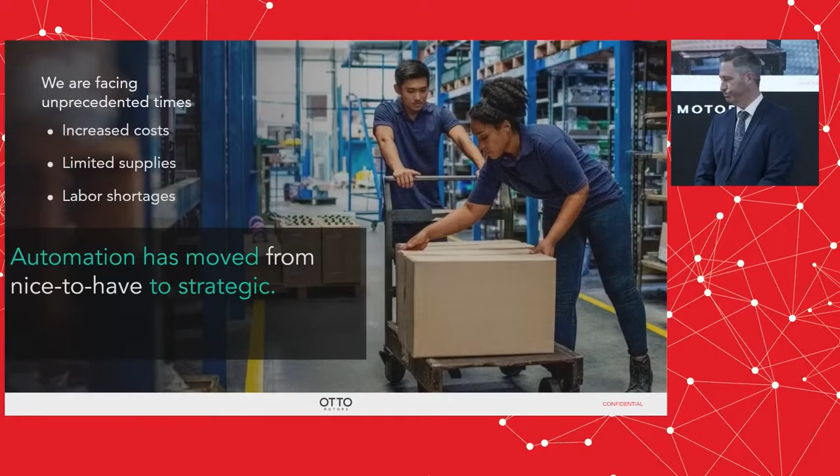When we look at material handling, it really hasn't changed in the last 30 years. We have people moving parts, we have manual pallet jacks, forklifts, conveyors, cranes, and AGVs.

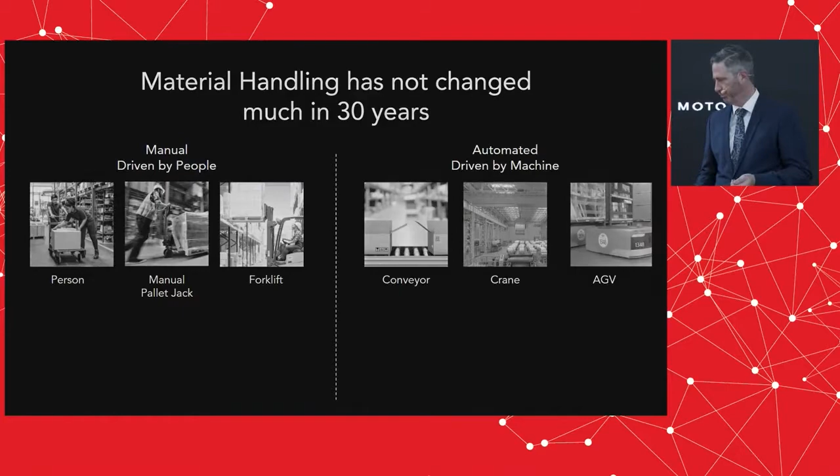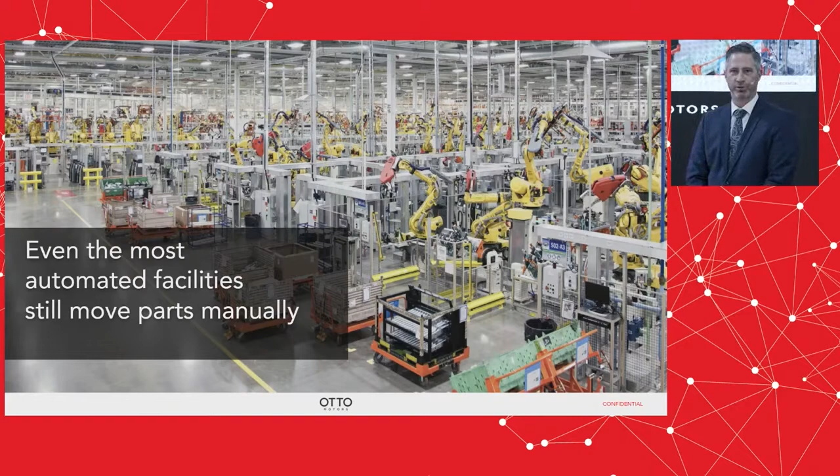So, with that said, Meet OTTO. We are in 100 plus sites globally. We have 12 years of material handling experience, and our target is to be 10% the cost of a full-time employee.

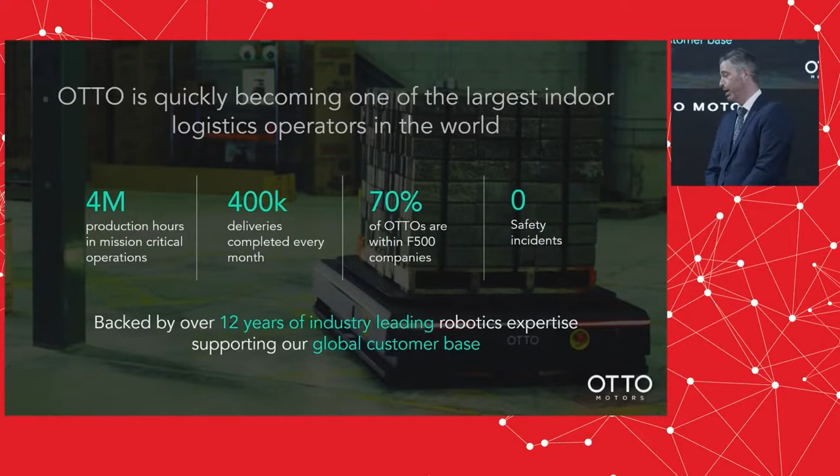We're quickly becoming one of the largest indoor logistics operators in the world. Our robots have over 4 million production hours in mission-critical operations in manufacturing facilities in the world. We have 400,000 deliveries completed every month. This means we're moving material from one point to another within your facility, within our partners' facilities, within our customers' facilities, and we're doing that 400,000 times each month.

70% of our OTTOs are within Fortune 500 companies, so we learn how to scale, grow with our customers, and are able to implement large autonomous mobile robot deployments within our customers' facilities. Something that we're very proud of is zero safety incidents. Our robots, our AMRs, have been designed to be safe around people.

So what makes OTTO different? We don't need a physical infrastructure. That means we don't need tags, we don't need tape on the floor. What we need is a good solid Wi-Fi, and we can move around the facility as you're seeing today with our OTTO moving around the show.

We have intuitive experience with our software, so our software tools are simple to use and they're scalable. They integrate with existing systems. They integrate with WES and WMS systems as well as MES systems within our customers' facilities.

We have the heaviest payload in the industry with 1,900 kilograms. We have a dedicated tech support team.

This is very important to us at OTTO Motors because it highlights our ability to train our integrators, train our customers, as well as give them a vast knowledge base of information at their fingertips so they can learn the OTTO systems, the robot systems, as well as the OTTO employees do.

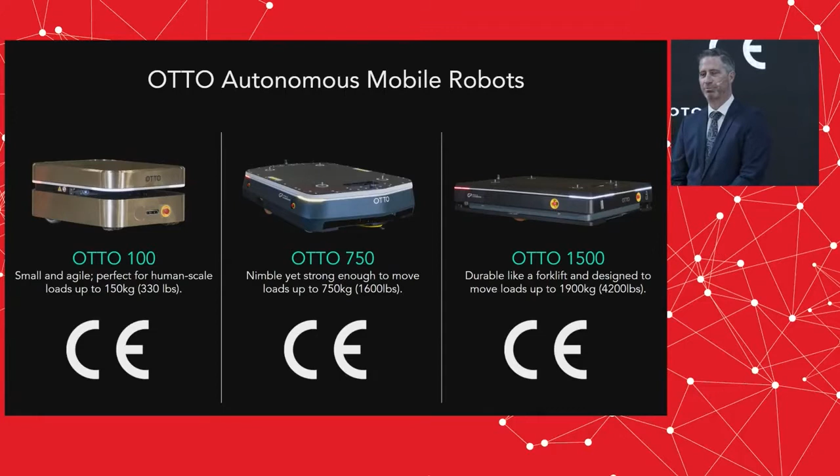I like to think of our OTTO 1500 as the forklift and the driver. So when it's taking a load of material from one place to another, it's dropping it off, it's doing that as the forklift and as the driver.

We have transport options to fit the needs of our customers. We can direct load onto our robots. We have a lift, so we're able to lift material up and move it around a facility, as well as a conveyor where we can either have inbound or outbound material as we mate with a conveyor within a factory.

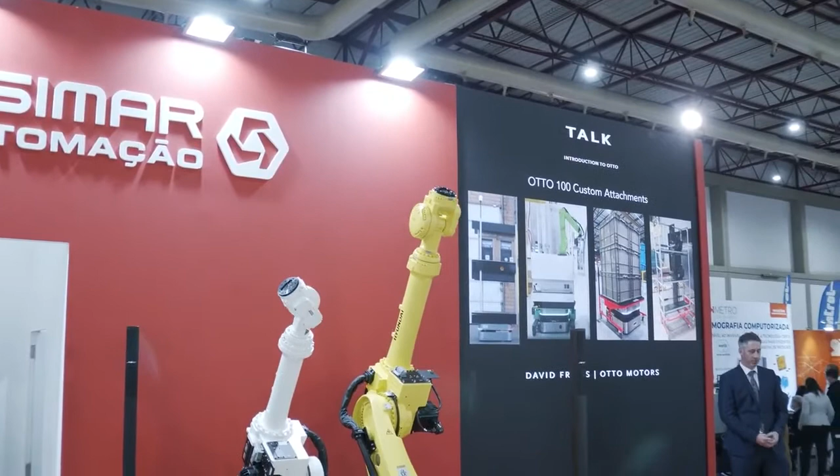Some examples of custom attachments for our OTTO 100 robots. We'll go from left to right. On the left, you can see a dual level conveyor, so the product is able to move on or off the robot on two separate levels. We have a more complex application where an OTTO connects to a robot controller, which is then able to machine tend CNC machines and move parts in and out of those machines. Then we go from that complex aspect of our OTTO 100 custom attachments to more basic ones. We can pile totes on top of a red cart and move material around a facility. We also have the ability to make racking for operators to put parts on or remove parts as needed, depending on where they are in the process and in the facility.

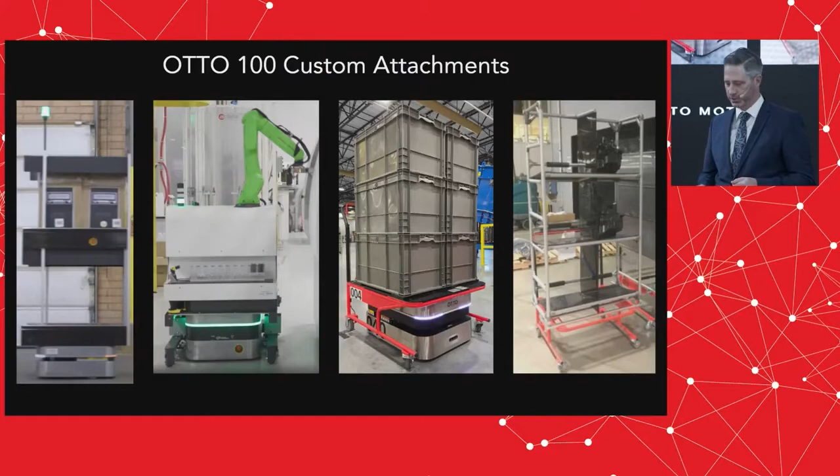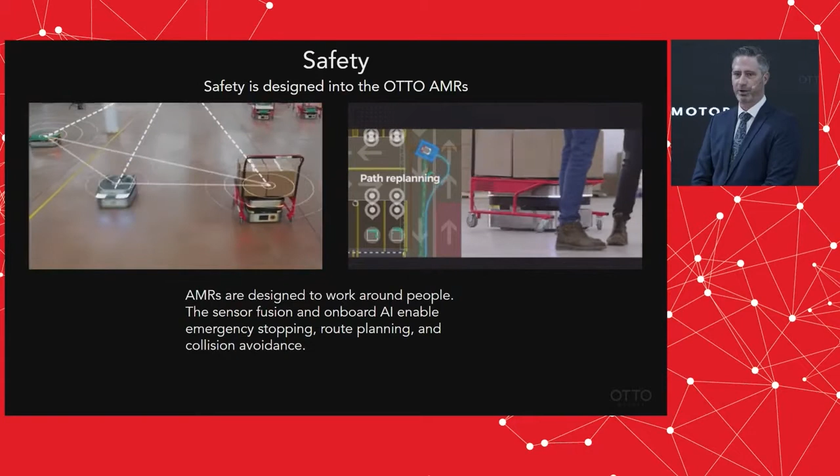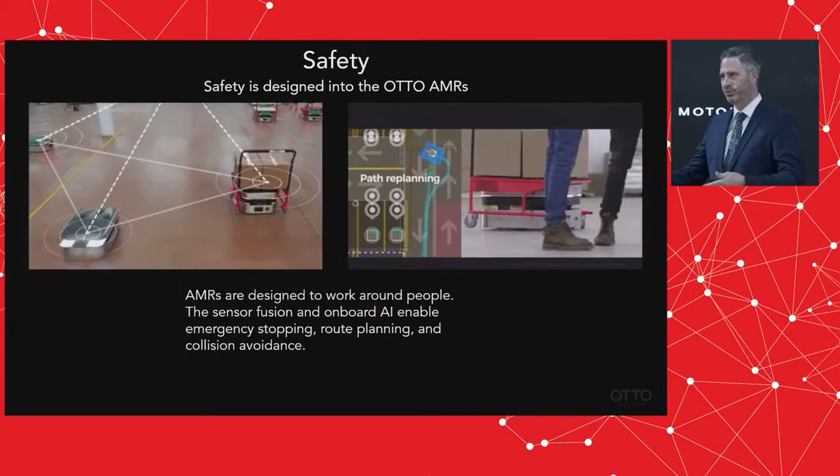Safety is designed into the OTTO AMRs. It's part of our initial thought and our strategy for customers to be safe and able to operate around the robots. Today, the OTTO is moving up and down aisles, and we can see people interacting with it, stepping in front of it, and there's no problem. The people are safe. In the videos, we're seeing that the OTTOs are communicating with each other in real time, understanding where they are in space, understanding where their obstacles are, and deciding the best path around the obstacle to navigate around it.

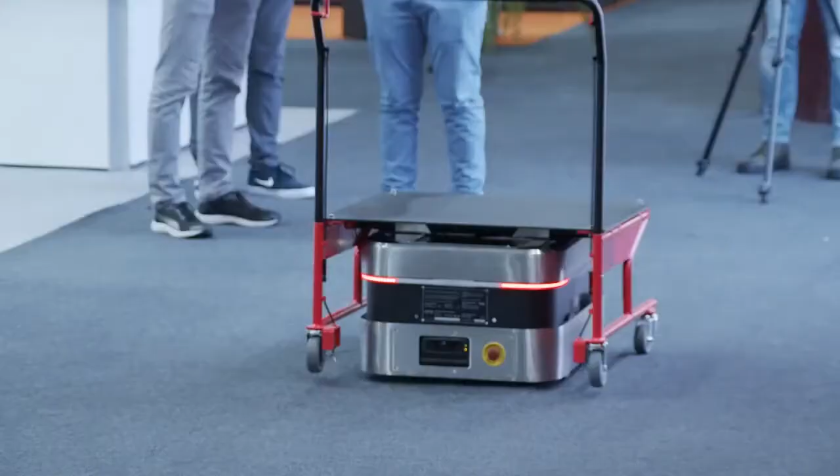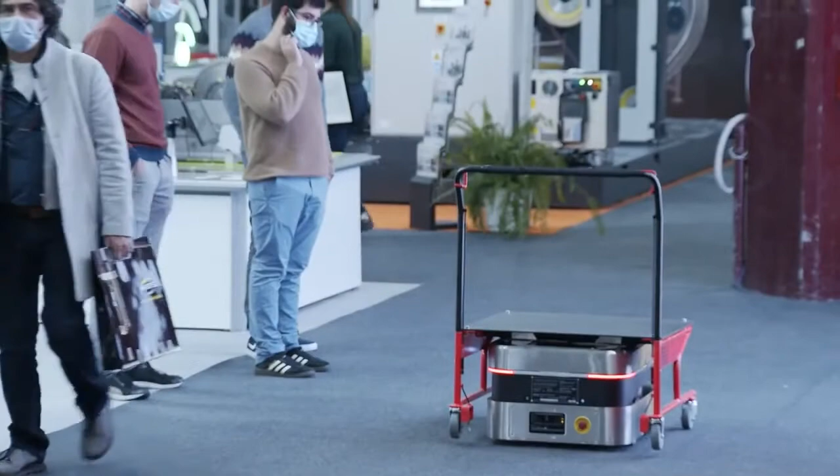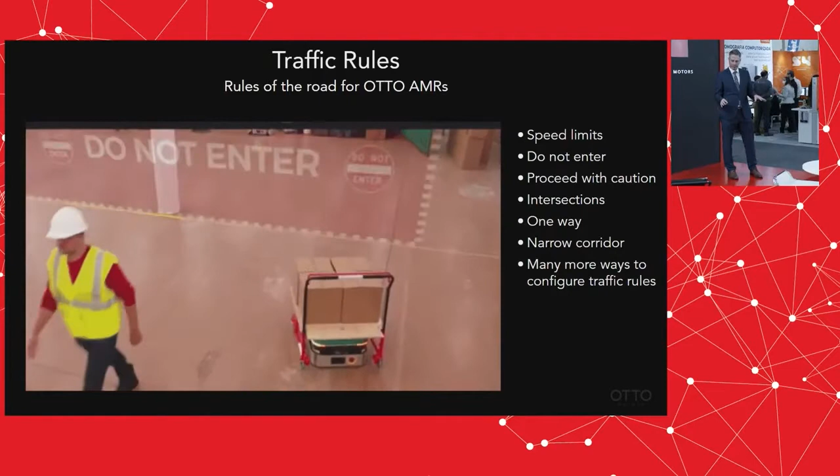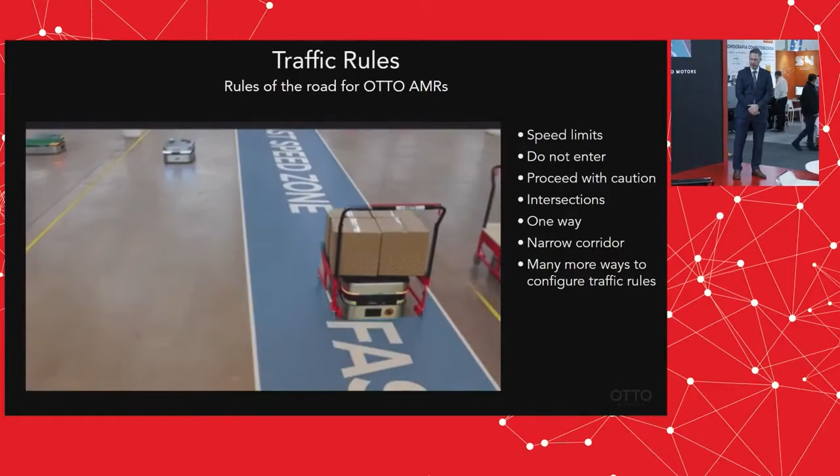Traffic rules. Just like when you left your house this morning, you have to follow the rules of the road, so do the AMRs. We have zones laid down within our software to allow us speed limits, do-not-enter zones, proceed-with-caution zones, intersections, one-way zones, and narrow corridors. Narrow corridor is if you have a very tight area, the robot will shrink its safety fields down and drive very slowly through that area. We have many more ways to configure the robots. Those are just a few examples of things you can also see on the screen and through that video.

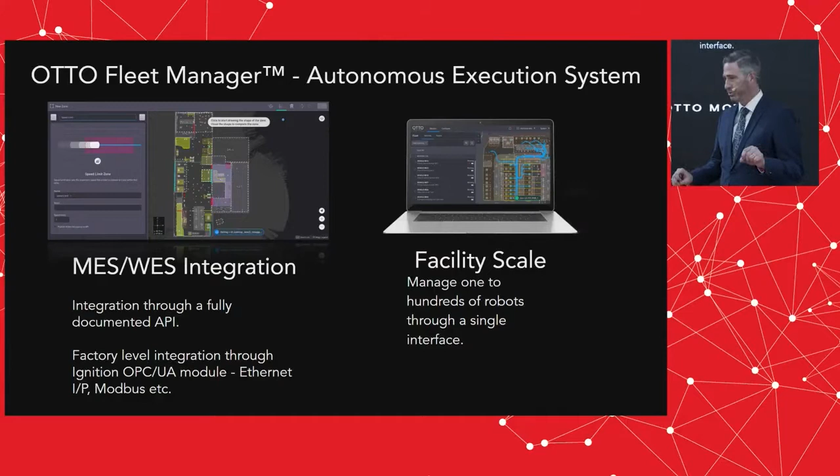Our Fleet Manager - we could spend a whole presentation on OTTO Fleet Manager, but just to touch on a few key points: we're able to integrate with MES and WES systems through a fully documented API. We're also able to talk at the PLC level, at the I/O level, on the factory floor, through the Ignition OPC UA module, which allows us to speak EtherNet/IP, Modbus, etc. - those types of factory protocols. And we're able to scale. Our Fleet Manager is able to scale with our customers; as easily as we can manage one robot within your facility, we can manage hundreds.

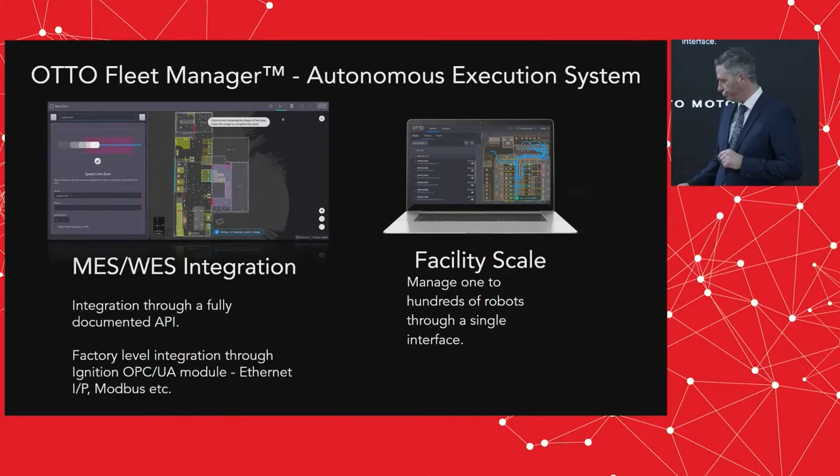Now I'd like to play two videos. They're very short, but they will give you an OTTO 100 application and an OTTO 1500 application, showing where they are operating and how they're operating in our customers' facilities.

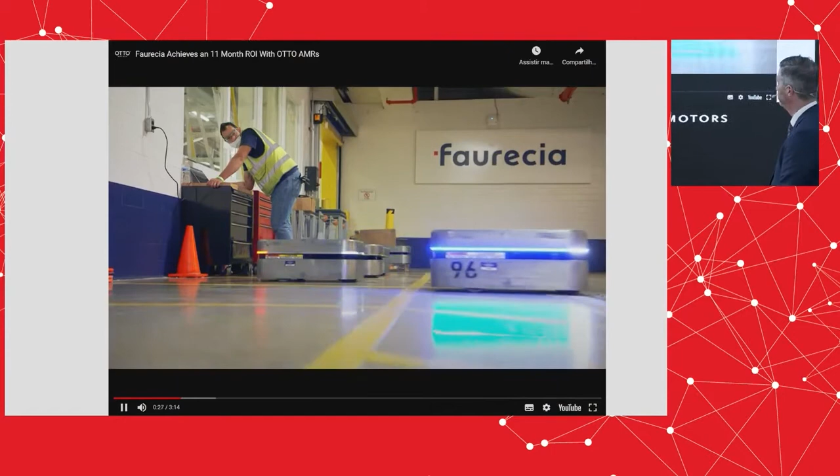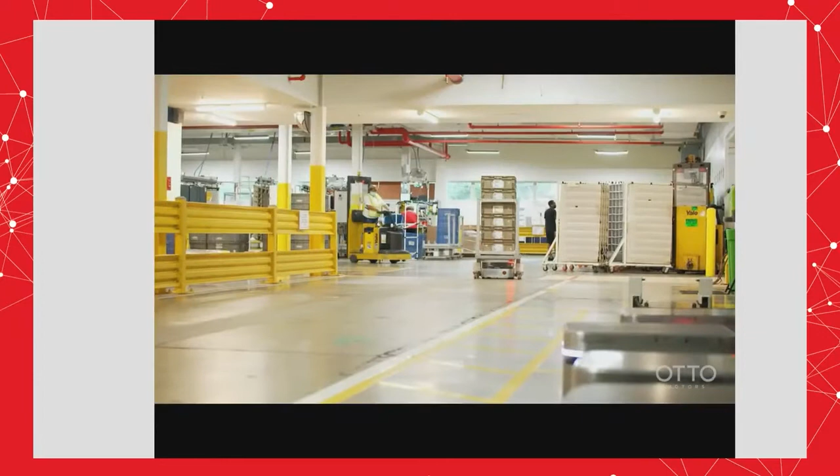We have 8 OTTO 100s with brake carts. We will be receiving 4 more in the future. It's happened once or twice here at Faurecia where the OTTO has accidentally been hit by a tugger or a high-low. The OTTOs are so robust that if it does take a hit from a high-low or a tugger, it's quick to reroute and complete the mission.

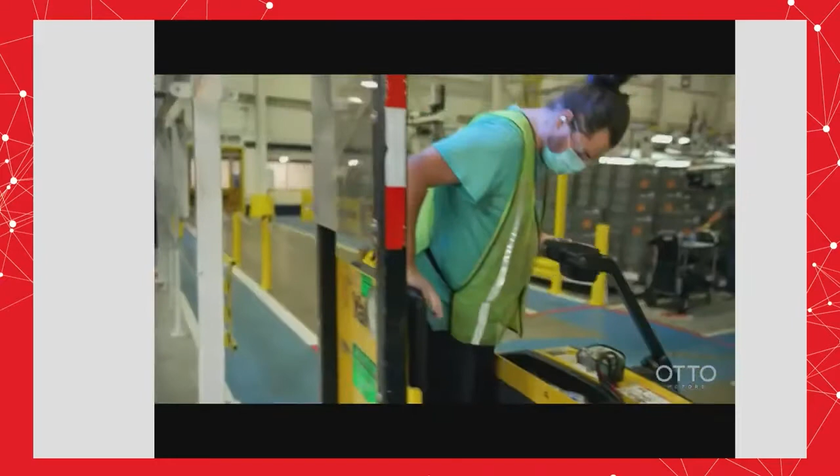One of the basic problems we're trying to solve is the material movement between the work cell and the warehouse. The OTTOs fit exactly what we needed to do, where it can pick its new path and doesn't need a magnetic strip. I was in charge of bringing OTTOs into the plant. I spent countless hours looking for someone to meet the footprint required by our corporate personnel, and OTTO stood out.

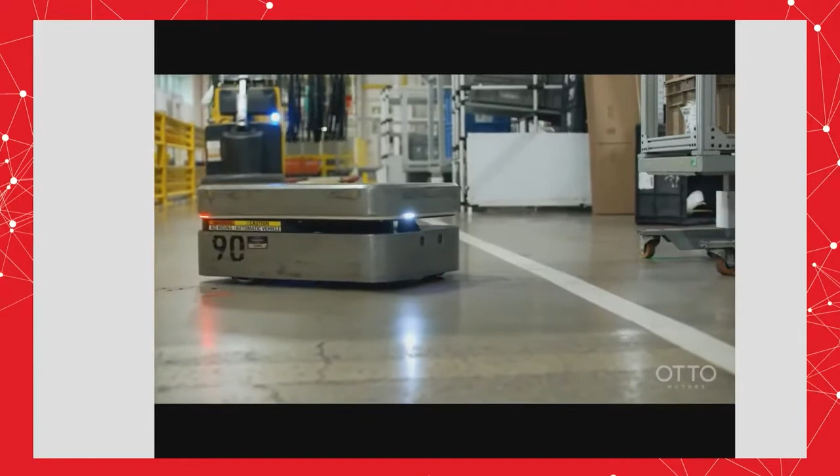Overall, it just needed to be a self-sufficient system. The OTTOs allow us to reduce our tugger drivers and hi-lo drivers, utilizing the manpower in a much more efficient way.

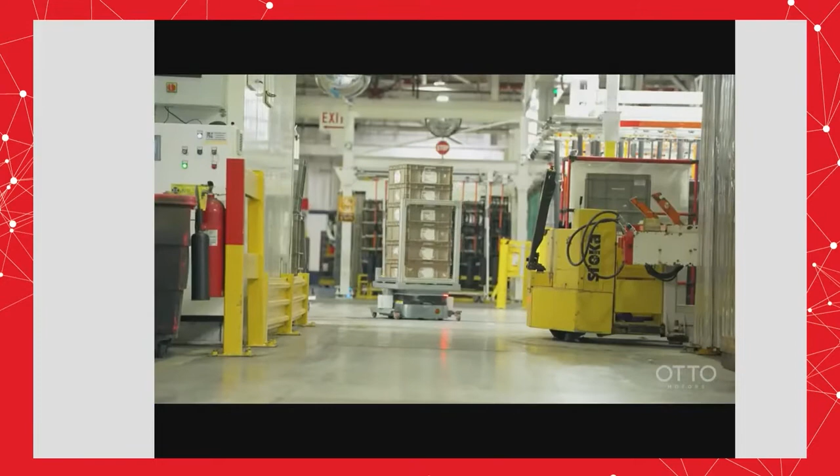The role the OTTOs play is the operator, once done stacking their totes, turns around and calls the OTTO with the tablet. The OTTO will then deliver the parts from Tech Bay over to our shipping warehouse, drop off a gray cart, pick up an empty gray cart, and bring it back up to Tech Bay.

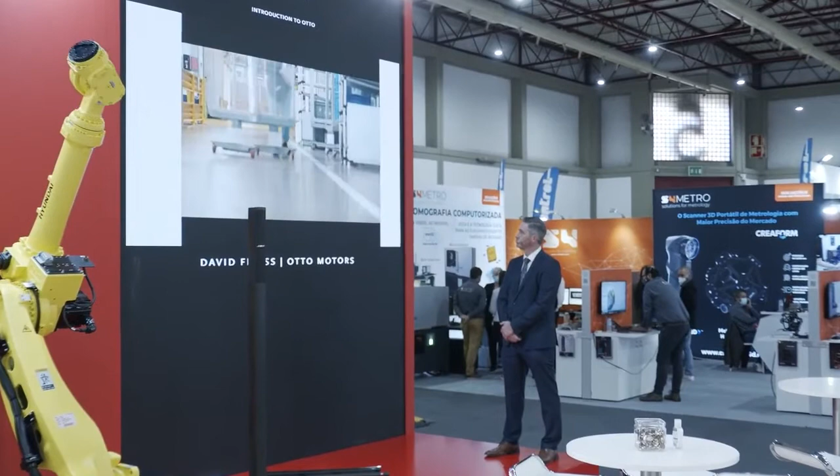The OTTOs have safety features that allow them to coexist with a tugger, an operator, and people crossing its path. We've been running the OTTOs for about a year and a half, with zero safety incidents.

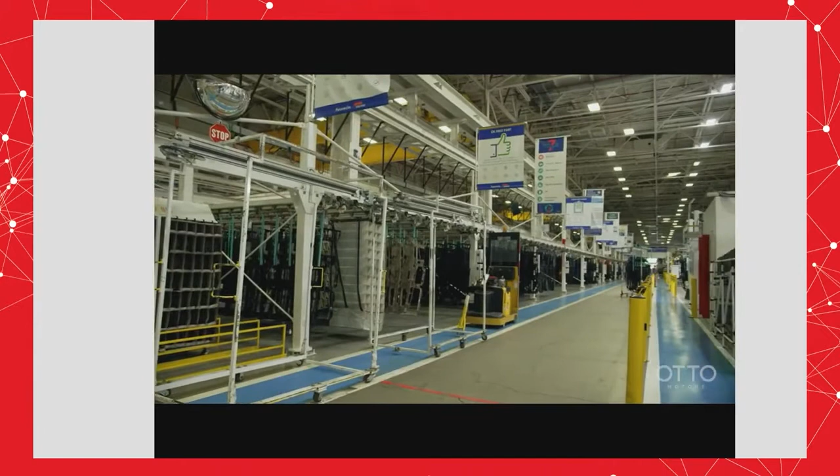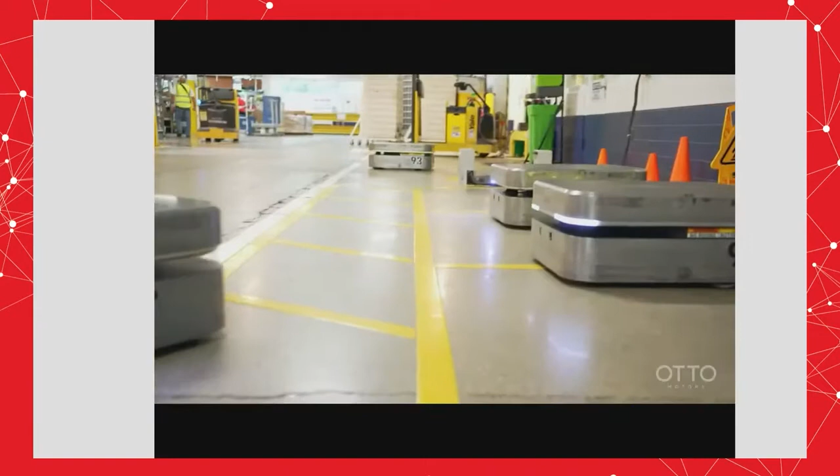We have a pretty big facility, so I can't visually see all 8 OTTOs at all times. In Fleet Manager, I'm able to see where the OTTO is and how long it's taking, but also things change in our plant all the time. I'm able to assist with remapping certain areas, put in an eraser zone, put in another zone, put in new routes. We wanted something that was totally flexible, and OTTO gave us that ability.

In fact, we moved a couple of cells in the plant a couple weeks ago. Within 45 minutes, we had a new parking lot and a new route for the OTTOs.

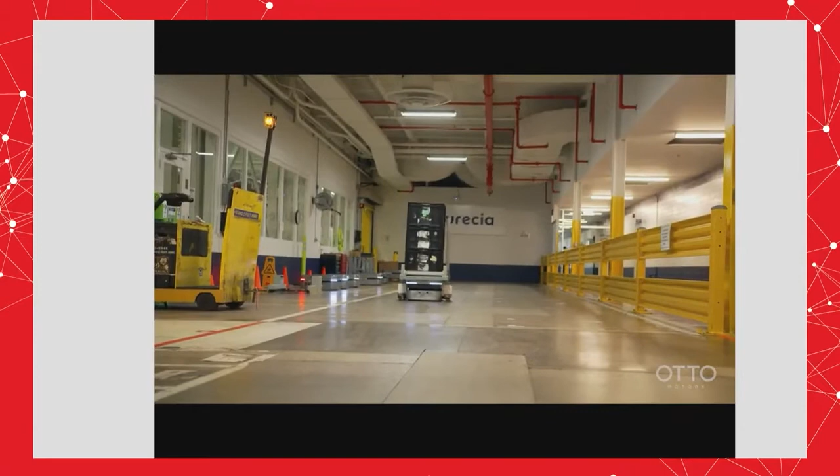We've run over 15,000 miles with the OTTO fleet over the last year. They operate 24 hours a day, 7 days a week, and they don't take breaks, nor do they show up late for work or get sick. We've only had very few downtime issues with the OTTO fleet itself.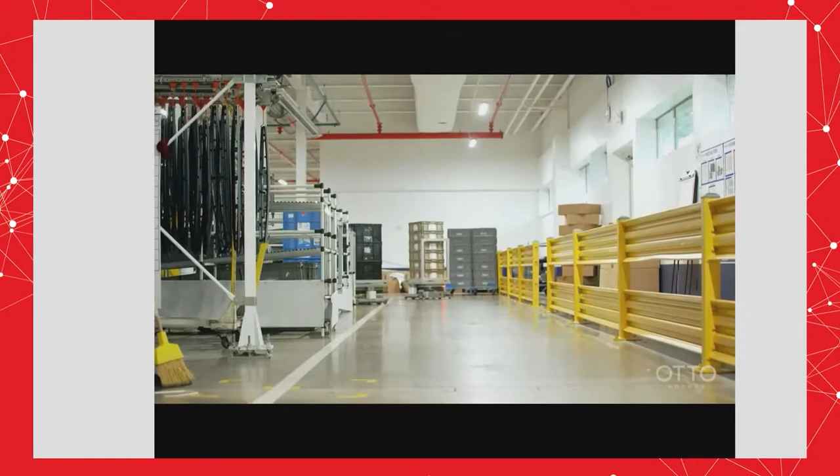Our return on investment for the OTTOs is about 11 months. We can utilize our workforce in a much more efficient way. The operators absolutely like the OTTOs - hands down, they actually prefer OTTOs to the old delivery way. It's really a no-brainer. We are expanding the fleet due to being noticed.

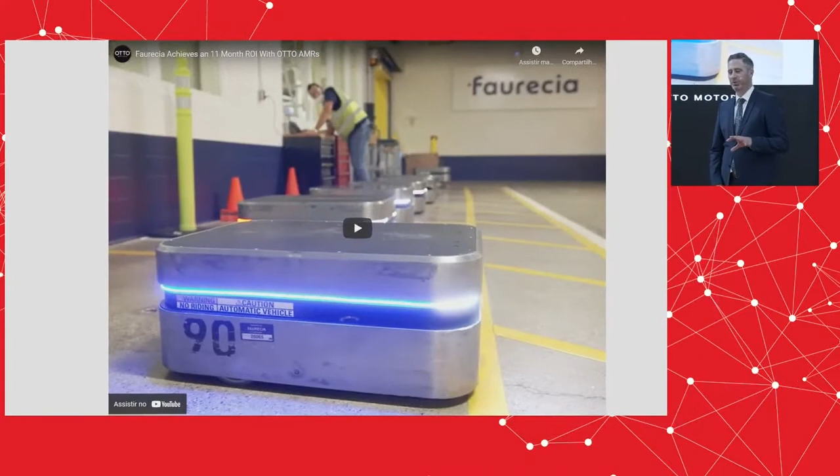Some key points: those OTTOs in the last year have run over 25,000 kilometers, so you can see the wear is showing on them. They've been run into by forklifts, etc., but they still keep running.

One more quick video for you, which is another customer we have, Danfoss. I'd like to play this video and show our OTTO 1500 capability with a conveyor on top of it.

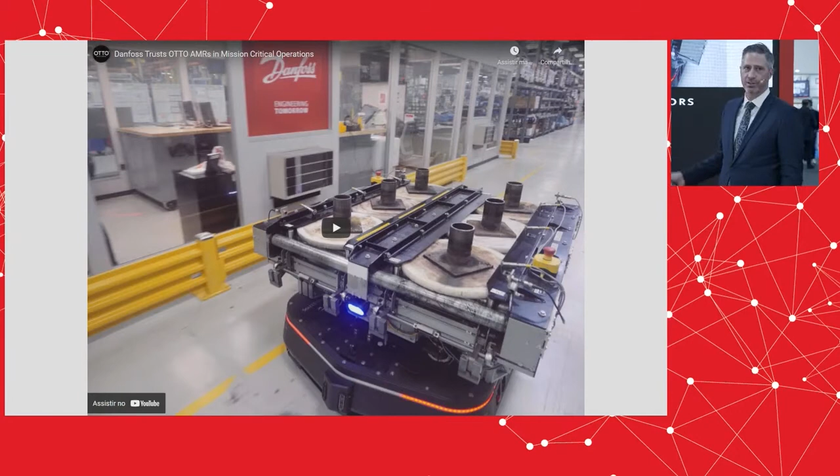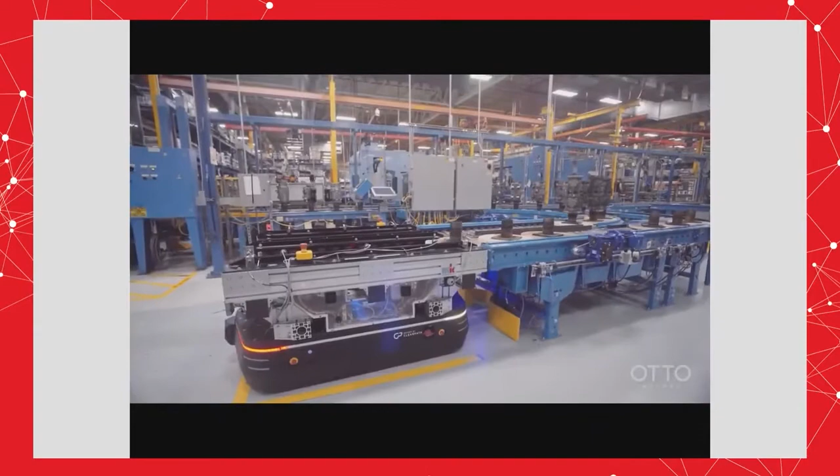We have 2 OTTO 1500s that are able to pick up 6 paint carriers from the paint line, deliver them to the assembly line that needs it, pick up 6 finished goods, and return them to the centralized paint system. We chose OTTO because of the suite of safety features they offer, audio and visual signals, and the ability to stop at stop signs.

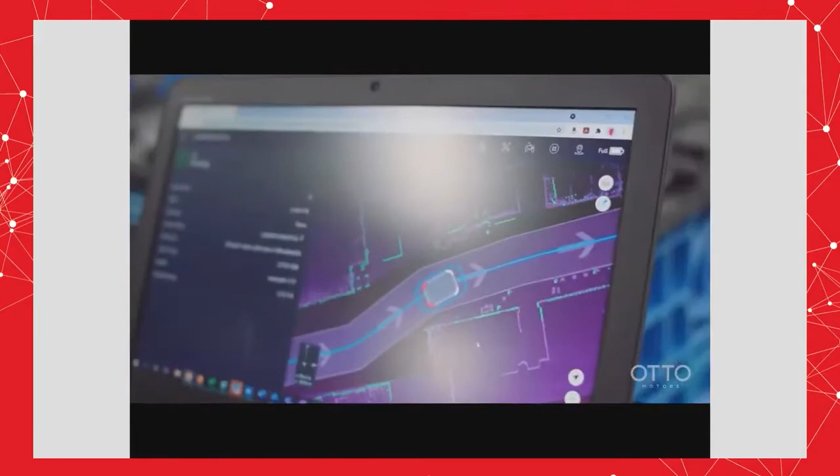Once we got to see their Fleet Manager software, it was apparent that their software is head and shoulders above the competition. It's easy to use, it's flexible, it's scalable. We can make the robots function just like our forklift operators would in under 5 minutes.

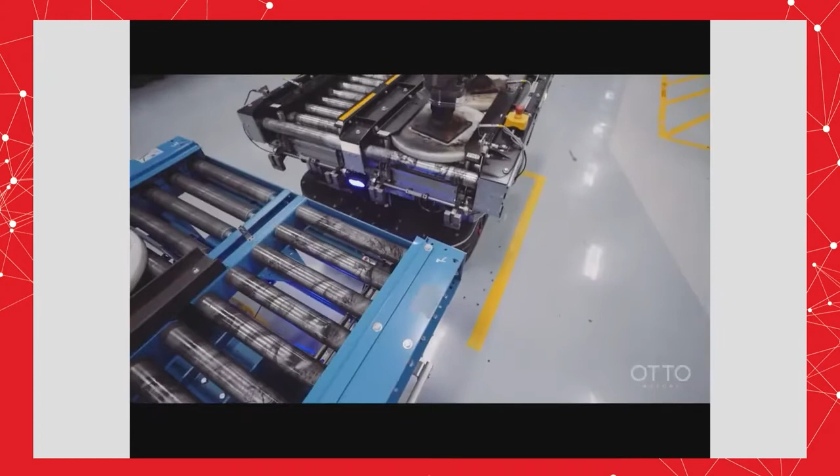They never call in sick, and they do the job day in, day out. I've had a great experience with the OTTO service team. They're quick to answer questions and help out and reach out any way that they can, and they also have great documentation online.

It could take me 3 days to install a conveyor and power and wire it over to a new assembly line, when I can program the OTTOs by myself without other assistance to pick up and take units in a matter of hours.

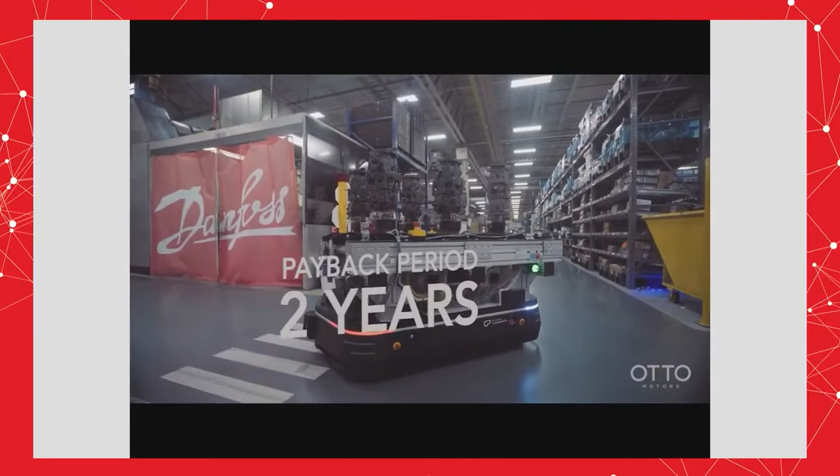By implementing an OTTO solution, we're able to avoid the equivalent of 4.5 material handler equivalents, with a payback period of just about 2 years. We believed OTTO really brought to us the most reliable performance that we could see in the market.

So there we can see that the ROI for OTTO is very aggressive. We're able to provide an attractive ROI for our customers so that they're able to have a solid payback period on their investment.

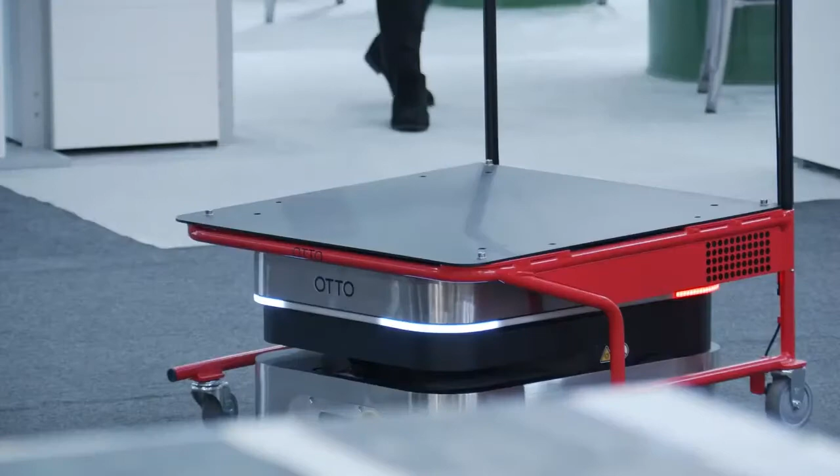So our goal at OTTO is to reduce costs, to amplify your workforce, to optimize production, and to improve your safety within your facility. So we're ready when you are. Thank you very much for your time.